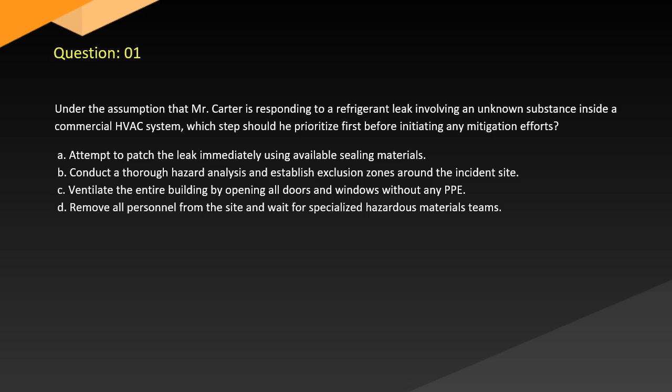Question 1. Under the assumption that Mr. Carter is responding to a refrigerant leak involving an unknown substance inside a commercial HVAC system, which step should he prioritize first before initiating any mitigation efforts? A. Attempt to patch the leak immediately using available sealing materials. B. Conduct a thorough hazard analysis and establish exclusion zones around the incident site. C. Ventilate the entire building by opening all doors and windows without any PPE. D. Remove all personnel from the site and wait for specialized hazardous materials teams.

Answer. Correct answer: B. Explanation: The first priority during a hazardous material leak incident is to conduct a thorough hazard analysis and establish exclusion zones - hot, warm, cold - per OSHA 29 CFR 1910.120 and EPA emergency response guidelines. This ensures personnel safety by controlling access based on risk levels before any mitigation or decontamination.

Immediate patching (A) or ventilating (C) without hazard assessment and PPE can exacerbate exposure risks. While evacuating personnel (D) is important, setting control zones is the critical initial step for site safety and effective incident management per the Incident Command System (ICS). This step aligns with OSHA's hazardous waste operations and emergency response HAZWOPER standards.

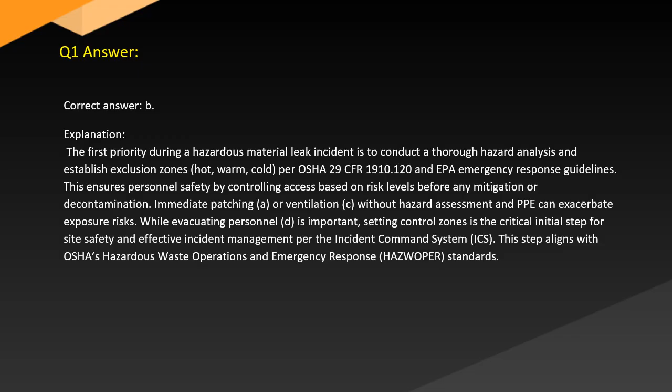Answer. Correct answer: B. Explanation: For moderate concentrations of ammonia, Level B PPE is recommended because it provides splash protection with SCBA for respiratory safety, without the full vapor-tight encapsulation required in unknown or highly toxic atmospheres (Level A). OSHA 29 CFR 1910.120 outlines PPE selection based on exposure risk and substance properties. Level C is insufficient due to ammonia's high toxicity and potential for severe respiratory damage. Level D offers no respiratory protection and is only for non-hazardous conditions. Choosing the correct PPE level minimizes exposure risk while balancing mobility and protection.

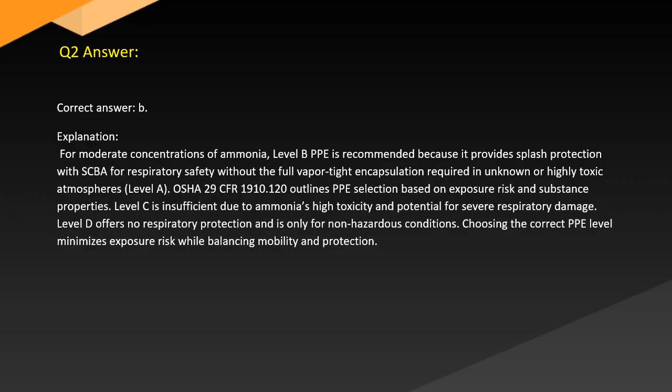Question 3. Given the circumstances that Mr. Lopez finds a leaking container labeled with a Class 2.3 poisonous gas placard but the UN number is missing, what should be Mr. Lopez's immediate action according to hazardous material regulations? A. Ignore the missing number since the placard identifies the hazard class. B. Consult the emergency response guidebook using the hazard class to identify the substance and take appropriate action. C. Attempt to transfer the contents to a properly labeled container. D. Remove the placard to avoid alarming people nearby.

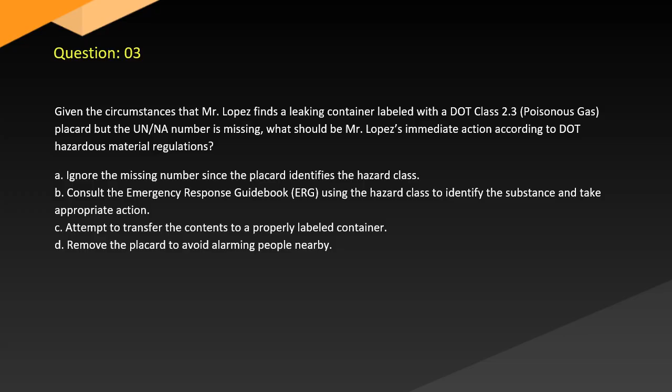Answer. Correct answer: B. Explanation: When a container lacks the UN number but displays a placard, responders must use the placard hazard class to reference the emergency response guidebook to identify potential risks and response protocols, per 49 CFR 172 Subpart F. Ignoring the missing number (A) can lead to incorrect handling. Transferring the contents (C) is hazardous without full identification, and removing placards (D) violates regulations and compromises safety. The ERG provides essential initial guidance based on hazard class, enabling safe incident management.

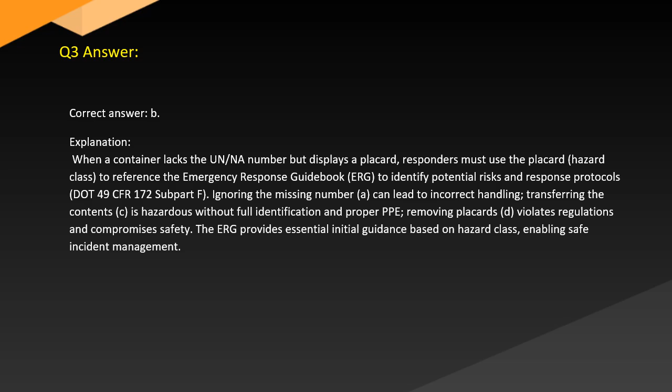Answer. Correct answer: A. Explanation: HFCs replaced CFCs primarily due to low ozone depletion potential, per Montreal Protocol compliance. However, HFCs can have high acute toxicity and may cause respiratory irritation, cardiac sensitization, or central nervous system effects if improperly handled, per EPA guidelines and OSHA standards. CFCs, while less acutely toxic, persist in the environment and deplete ozone. Neither is completely harmless. Thus, proper PPE and ventilation remain essential. The key health difference is toxicity profiles, not absence of risk.

Question 5. When considering decontamination procedures after a technician is exposed to a refrigerant spill with oil contamination, which decontamination approach is most appropriate to prevent secondary contamination and health risks? A. Gross decontamination followed by technical decontamination with specific solvents for compressor oil. B. Immediate dry brushing to remove all residues without any water. C. Allowing the oil to evaporate naturally before leaving the site. D. Using household detergents without PPE in a non-designated area.

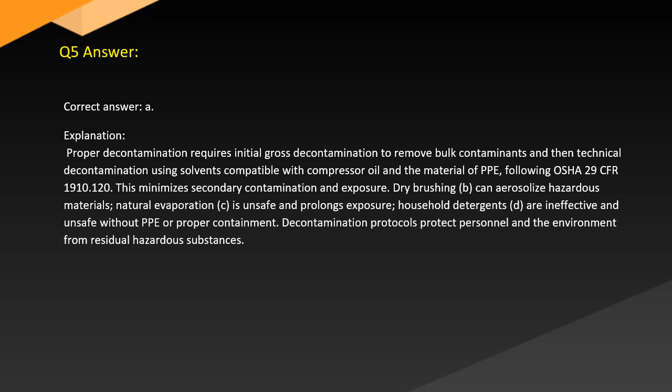This minimizes secondary contamination and exposure. Dry brushing (B) can aerosolize hazardous materials, and natural evaporation is unsafe and prolongs exposure. Household detergents (D) are ineffective and unsafe without PPE or proper containment. Decontamination protocols protect personnel and the environment from residual hazardous substances.

Question 6. From a practical standpoint, during a hazardous materials incident involving propane gas leakage at an HVACR site, which containment method should be prioritized to minimize fire and explosion risks? A. Use diking and damming to contain liquid propane pools on the ground.

B. Apply dry absorbents directly to the propane vapor cloud. C. Initiate vapor suppression using foam agents to reduce vapor release. D. Increase ventilation without any containment efforts.

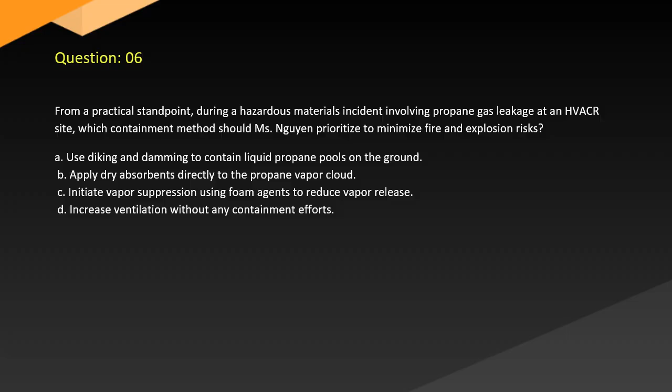Answer: Correct answer C. Explanation: Propane is highly flammable, and vapor suppression using foam agents (AFFF) is effective in minimizing vapor release and reducing fire explosion risk, as recommended by NFPA 58 and EPA spill response guidelines. Diking (A) is more suitable for liquid pools, but propane vaporizes quickly.

Dry absorbents (B) do not affect gases. Ventilation (D) without containment can spread flammable vapors, increasing hazards. Vapor suppression stabilizes the atmosphere and enhances safe mitigation.

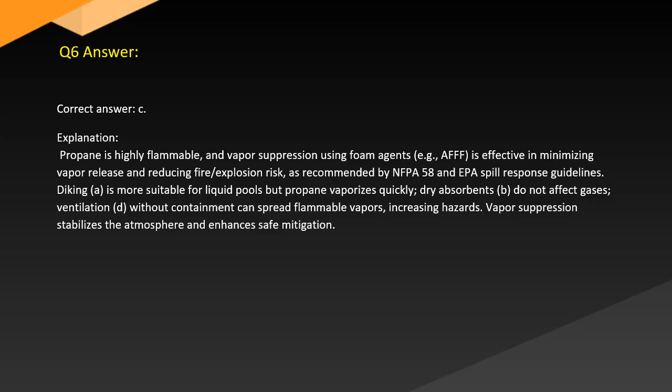Question 7. Considering the evidence from recent emergency response cases, which of the following best describes the critical aspect of establishing exclusion zones during an HVACR hazardous material incident? A. Exclusion zones are set arbitrarily based on available space around the incident.

B. The hot zone includes the contamination area where only fully protected personnel may enter. C. The cold zone is where hazardous materials are concentrated and requires the highest PPE level. D. Exclusion zones are not necessary if the incident involves non-toxic refrigerants.

Answer: Correct answer B. Explanation: Exclusion zones are based on risk assessment and site characterization, not arbitrary space allocation, contradicting A. The hot zone, or exclusion zone, includes the contamination area and requires the highest PPE level and restricted access, per OSHA 29 CFR 1910.120.

The cold zone is a safe area for support personnel and the command post, not the contamination zone, contradicting C. Even non-toxic refrigerants can pose physical hazards, so zones are always needed, contradicting D. Proper zone management is essential for safety and effective incident control.

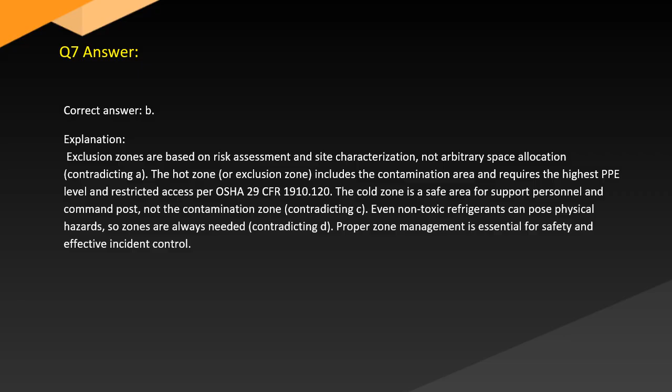Question 8. When evaluating the merits of using air purifying respirators (APRs) versus self-contained breathing apparatus (SCBA) during an HVACR refrigerant leak, which statement best reflects their appropriate application? A. APRs are suitable for unknown concentrations of toxic refrigerants.

B. SCBAs provide independent air supply and are required for oxygen-deficient or highly toxic environments. C. APRs offer better protection than SCBAs in confined spaces. D. SCBAs should be avoided due to bulkiness and mobility constraints.

Answer: Correct answer B. Explanation: SCBAs supply breathable air independent of ambient atmosphere and are mandated by OSHA and NIOSH for oxygen-deficient or unknown highly toxic environments, per 29 CFR 1910.134. APRs filter ambient air and are only suitable when the contaminant type and concentration are known and oxygen levels are adequate. APRs are unsafe for unknown or oxygen-deficient atmospheres, contradicting A.

Despite bulkiness, SCBAs provide the highest respiratory protection, contradicting C and D. Selecting respirators based on hazard assessment is critical for safety.

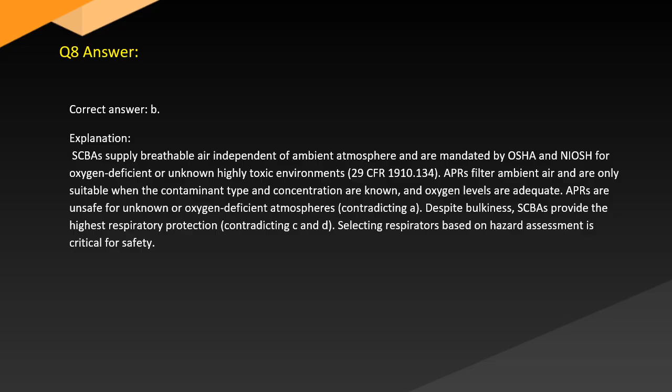Question 9. In the context of hazardous materials laws, Mr. Daniels is reviewing the requirements for documenting an HVACR refrigerant shipment that contains ozone-depleting substances. What is the essential documentation requirement under EPA regulations?

A. Only a verbal statement to the carrier is needed for refrigerant shipment. B. Complete shipping papers including quantity, type of refrigerant, and certification of reclaim or recycling must accompany the shipment. C. No documentation is required for small quantities of refrigerant under 10 pounds. D. Shipping papers only need to state the refrigerant's common name.

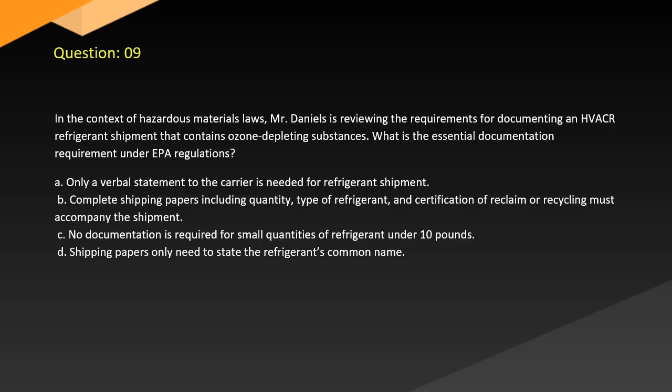Answer: Correct answer B. Explanation: EPA regulations 40 CFR Part 82 require complete shipping papers that include refrigerant quantity, chemical type, and certification that refrigerant has been reclaimed or recycled, per Clean Air Act requirements. This documentation ensures traceability and regulatory compliance.

Verbal statements (A) and incomplete papers (D) are insufficient. Small quantities (C) are still regulated, depending on transport mode and state laws. Proper documentation supports safe transport and environmental protection.

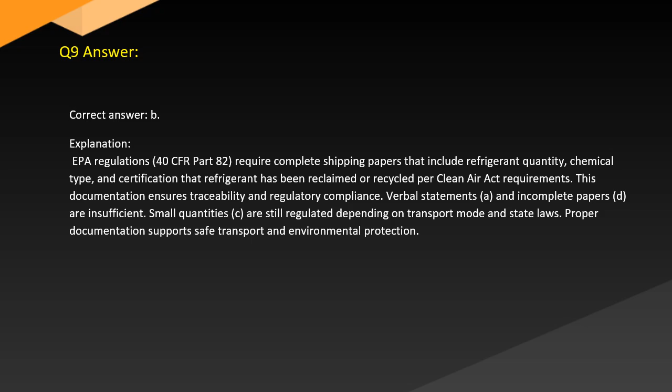Question 10. As demonstrated by an incident where improper container recognition led to a hazardous release, which best describes the importance of understanding container types in hazardous material management for HVACR technicians? A. All containers used in HVACR are standardized and require no special recognition. B. Correct container recognition allows appropriate handling, PPE selection, and spill response tailored to the material's physical and chemical properties. C. Container recognition only matters for transportation personnel, not field technicians. D. Containers with damaged labels should be ignored as they are no longer valid. Answer: Correct answer B.

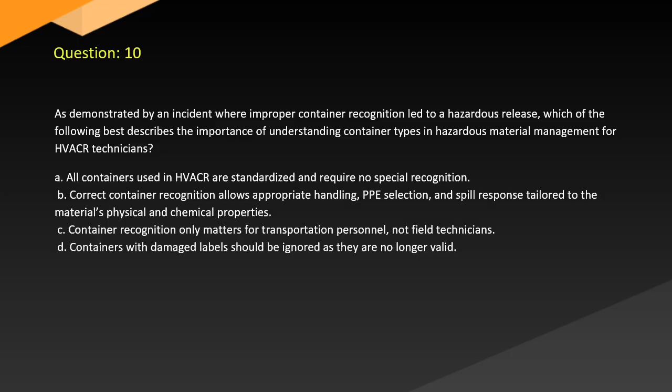Explanation: HVACR technicians must recognize container types, e.g., cylinders, drums, bulk tanks, to determine potential hazards such as pressure, chemical reactivity, and appropriate PPE and containment methods, per 49 CFR and OSHA HAZWOPER standards. This knowledge is critical for safe handling and emergency response. Assuming standardization is unsafe; container recognition is vital for all responders, including technicians, contradicting C. Damaged labels require extra caution and should never be ignored, contradicting D. Proper container identification reduces risk and enhances safety.

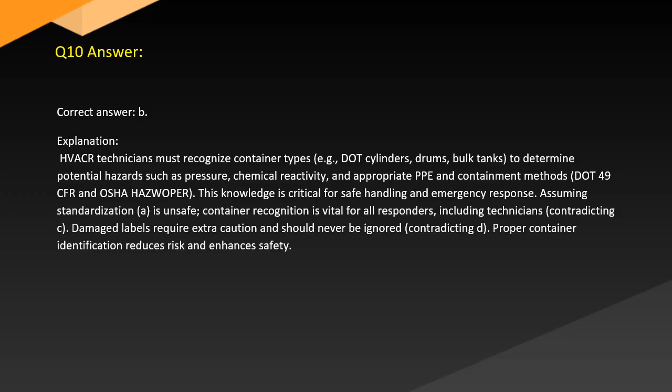Question 11. In the context of a hazardous refrigerant leak at a large commercial HVAC site, Mr. Patel must determine the appropriate exclusion zone boundaries. Given a volatile and toxic refrigerant release, what is the best approach for establishing these zones? A. Establish a cold zone directly surrounding the leak source to allow for quick personnel access. B. Define the hot zone around the contamination area, restricting access only to personnel in full Level A. C. Use a single exclusion zone encompassing the entire site to simplify control measures. D. Assign the warm zone to the area with highest vapor concentration and allow only non-PPE personnel to enter.

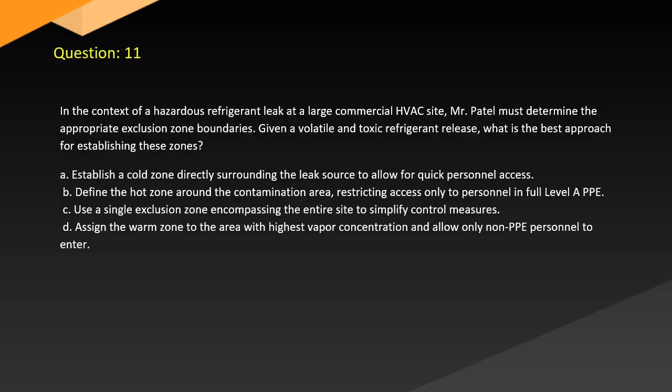Answer: Correct answer B. Explanation: According to OSHA 29 CFR 1910.120 and EPA emergency response standards, the hot zone is the area with actual contamination or hazard where only personnel equipped with the highest level of PPE, Level A, can enter. The cold zone is a safe area for command and support personnel, while the warm zone acts as a buffer used for decontamination and support functions. Simplifying all zones into one, as in C, reduces safety and control. Warm zones are restricted, not open to non-PPE personnel, contradicting D. Correct zone definition is essential for protecting responders and the public.

Question 12. Based on the information Mr. Thomas has regarding an HVACR compressor oil spill mixed with refrigerant, which chemical protective clothing consideration should guide his PPE selection? A. Use standard rubber gloves as compressor oil is non-toxic and non-corrosive. B. Select chemically resistant gloves and suits compatible with both oil and refrigerant to prevent skin absorption and chemical burns. C. Only respiratory protection is necessary, as skin contact with compressor oil is harmless. D. Use cotton clothing with no respiratory or chemical protection to maximize comfort.

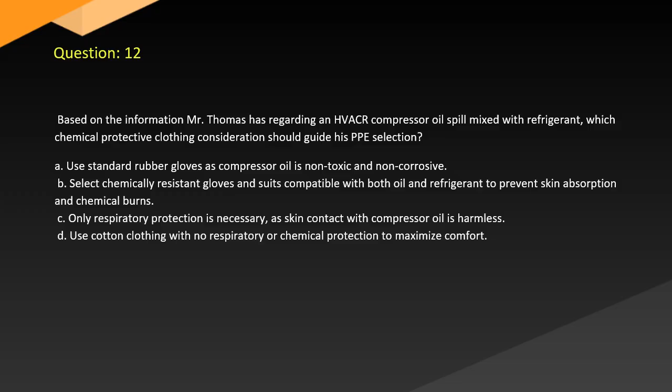Answer: Correct answer B. Explanation: Compressor oil can contain additives and breakdown products that are toxic and irritating, while refrigerants can cause frostbite and chemical burns. OSHA 29 CFR 1910.120 requires chemical-resistant protective clothing compatible with the substances involved. Standard rubber gloves may degrade and provide insufficient protection. Skin absorption and chemical burns are risks, making comprehensive PPE critical. Neglecting skin protection or respiratory equipment increases hazard exposure.

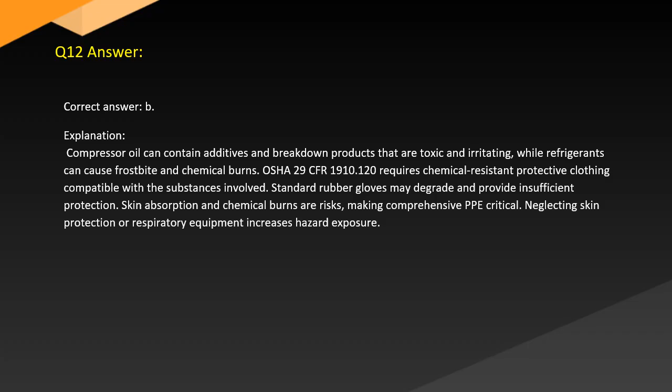Question 13. When analyzing the merits of using dry absorbents versus adsorbents during an HVAC or refrigerant spill, which best explains their appropriate use? A. Absorbents soak up liquids by penetration, while adsorbents bind contaminants on their surface; both are suitable depending on the spill type. B. Dry absorbents and adsorbents function identically and can be used interchangeably. C. Adsorbents dissolve the refrigerant chemically, while absorbents neutralize the spill. D. Neither absorbents nor adsorbents are effective for refrigerant spills.

Answer: Correct answer A. Explanation: Absorbents, e.g., vermiculite, clay, physically soak up liquid spills, while adsorbents, e.g., activated carbon, bind chemicals to their surface without penetration. Selecting the correct material depends on the refrigerant's physical state and chemical properties. This distinction is outlined in EPA spill response and cleanup guides. They are not interchangeable, contradicting B. Neither chemically dissolves nor neutralizes refrigerants, contradicting C. Proper use enhances cleanup efficiency and safety.

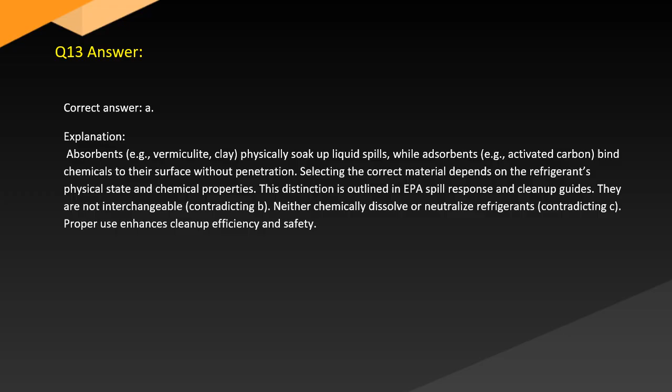Question 14. With respect to HVACR hazardous material shipping, Lewis is verifying compliance with DOT labeling and placarding requirements. Which of the following is true regarding placards for hazardous material shipments? A. Placards must be displayed on all four sides of the transport vehicle for shipments of 1,001 pounds or more of hazardous materials. B. Placards are optional for bulk shipments under 5,000 pounds. C. Only the shipping container requires placards, not the transport vehicle. D. Placards must be removed immediately after loading is complete.

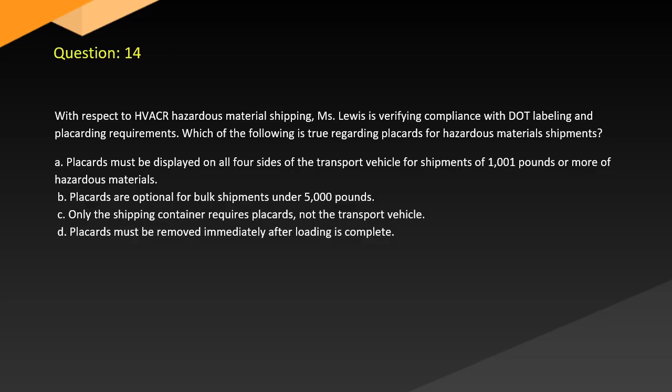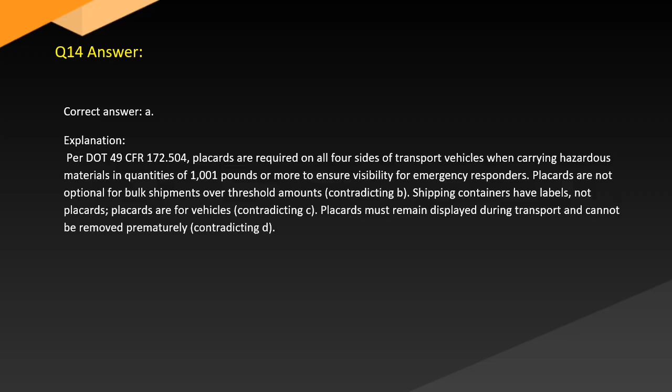Answer: Correct answer A. Explanation: Per DOT 49 CFR 172.504, placards are required on all four sides of transport vehicles when carrying hazardous materials in quantities of 1,001 pounds or more, to ensure visibility for emergency responders. Placards are not optional for bulk shipments over threshold amounts, contradicting B. Shipping containers have labels, not placards; placards are for vehicles, contradicting C. Placards must remain displayed during transport and cannot be removed prematurely, contradicting D.

Question 15. Considering the evidence from HVACR emergency response protocols, Mr. Garcia is tasked with selecting the most effective ventilation method after a refrigerant vapor release indoors. Which ventilation strategy minimizes hazard spread and exposure?

A. Use positive pressure ventilation to force fresh air inward from all sides. B. Implement natural ventilation by opening windows at low points only. C. Employ mechanical ventilation to create controlled airflow from clean areas to contaminated areas, exhausting outdoors. D. Shut all ventilation systems off to prevent vapor spread.

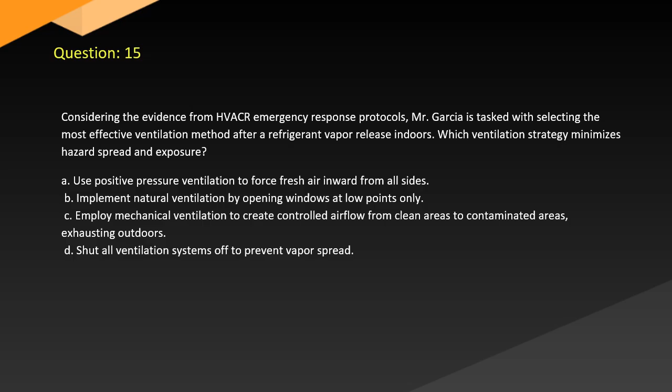Answer: Correct answer C. Explanation: Controlled mechanical ventilation directing airflow from uncontaminated, clean zones to contaminated zones. Venting outdoors minimizes cross-contamination and exposure, per EPA and OSHA HAZWOPER guidelines.

Positive pressure ventilation can push vapors into safe areas, increasing risk. Natural ventilation alone is unpredictable and often insufficient. Shutting off ventilation traps vapors inside, increasing risk. Proper ventilation is critical for effective hazard mitigation.

Question 16. When faced with a scenario where Alvarez detects a refrigerant leak in an HVACR system containing R22, which is being phased out under the EPA SNAP program, what considerations should she keep in mind regarding environmental compliance?

A. R22 can be vented freely as long as the leak is small. B. All venting of R22 during maintenance or disposal is prohibited under EPA regulations. C. R22 leaks require immediate repair but no documentation. D. R22 is not regulated since alternatives exist.

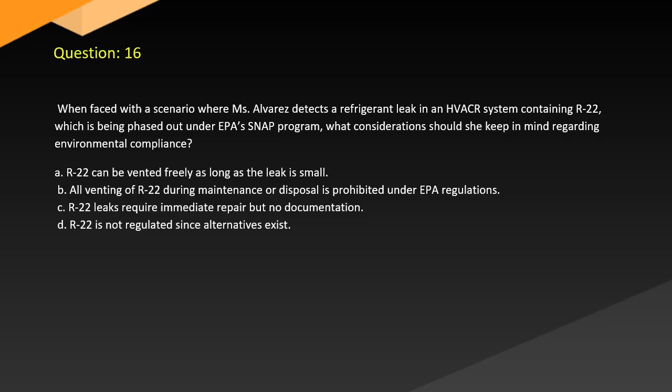Answer: Correct answer B. Explanation: EPA's Significant New Alternatives Policy, SNAP, prohibits venting of ozone-depleting substances like R22 under 40 CFR Part 82. Venting any quantity during maintenance or disposal is illegal.

Immediate repair is required and proper documentation of leak repair and refrigerant handling must be maintained, contradicting C. R22 remains regulated until fully phased out. Free venting (A) or ignoring regulations (D) violates Clean Air Act provisions and may incur penalties.

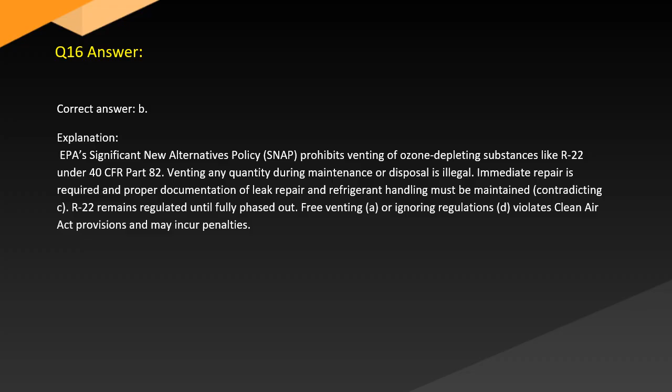Question 17. Under the assumption that Istaun is managing an incident involving combustible dust accumulation in an HVACR maintenance area, which preventive measure aligns best with OSHA and NFPA guidelines to reduce explosion risks?

A. Regular housekeeping to remove dust deposits and ensure proper ventilation. B. Allowing dust accumulation since it is non-hazardous in HVACR environments. C. Using open flames to burn off combustible dust. D. Ignoring dust buildup as long as electrical equipment is grounded.

Answer: Correct answer A. Explanation: OSHA 29 CFR 1910.22 requires good housekeeping to prevent combustible dust accumulation, while NFPA 654 provides guidelines to reduce dust explosion risks through ventilation and dust control.

Dust buildup is hazardous. Ignoring it (B and D), or using open flames (C), can lead to catastrophic explosions. Effective dust control is a key strategy for safety.

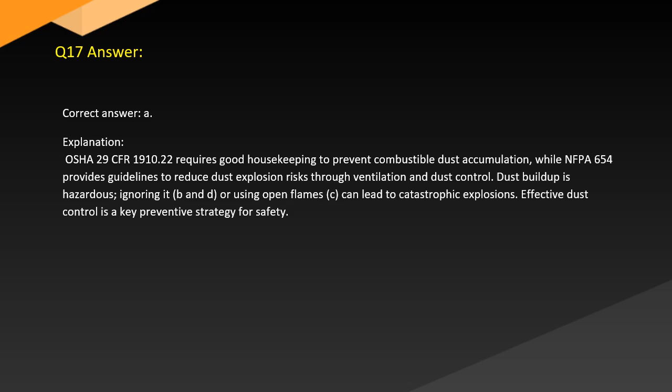Question 18. From the perspective of emergency response communication, Robinson is leading a hazardous material incident. Which communication practice best ensures efficient and safe operations?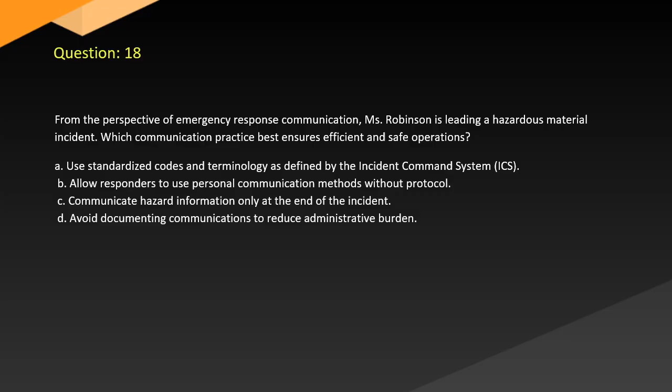A. Use standardized codes and terminology as defined by the Incident Command System (ICS). B. Allow responders to use personal communication methods without protocol. C. Communicate hazard information only at the end of the incident. D. Avoid documenting communications to reduce administrative burden.

Answer: Correct answer A. Explanation: Effective communication following ICS protocols ensures clarity, reduces confusion, and enhances safety during hazardous material incidents, per FEMA ICS guidelines and OSHA 29 CFR 1910.120. Personal or ad hoc communication (B)...

Risks miscommunication. Delayed hazard communication (C) endangers responders and the public. Documentation (D) is essential for accountability and post-incident analysis. Standardized communication supports coordinated response.

Question 19. When analyzing the physical properties of refrigerants, Jackson must consider the importance of vapor pressure in relation to containment and leak risks. Which statement best reflects this relationship?

A. High vapor pressure refrigerants evaporate quickly, increasing leak and exposure risks. B. Vapor pressure has no impact on refrigerant leak hazards. C. Low vapor pressure refrigerants are more likely to vaporize at room temperature. D. Vapor pressure only affects refrigerant efficiency, not safety.

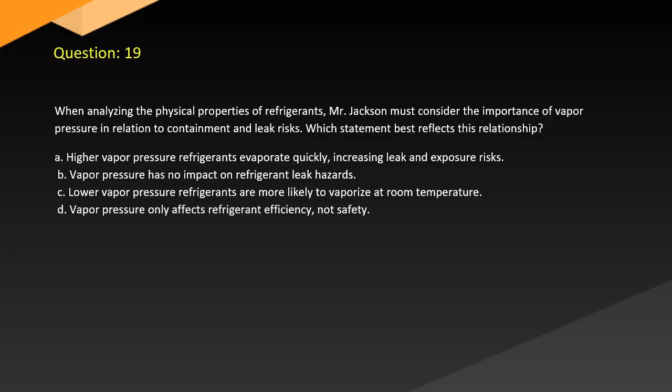Answer: Correct answer A. Explanation: Refrigerants with high vapor pressure evaporate rapidly at ambient temperatures, creating a greater potential for leaks and hazardous vapor exposure, per the ASHRAE Handbook Fundamentals. Understanding vapor pressure helps technicians anticipate containment needs and select appropriate leak detection and PPE.

Ignoring vapor pressure (B and D) risks underestimating hazards. Low vapor pressure refrigerants tend to remain liquid longer, reducing immediate vapor hazards, contradicting C.

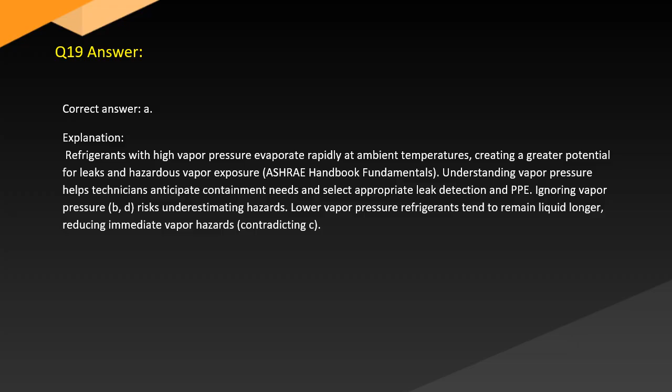Question 20. In terms of hazardous materials incident waste management, Carter must ensure proper disposal of contaminated PPE after responding to an HVACR refrigerant leak. Which practice complies with hazardous waste regulations? A. Dispose of contaminated PPE as regular trash to avoid complicating waste handling. B. Decontaminate PPE thoroughly and reuse without any special handling. C. Collect contaminated PPE in labeled hazardous waste containers and coordinate disposal through licensed waste handlers. D. Burn contaminated PPE on site to destroy hazards immediately.

Answer: Correct answer C. Explanation: OSHA 29 CFR 1910.120 and EPA Resource Conservation and Recovery Act require contaminated PPE to be segregated, labeled, and disposed of via licensed hazardous waste disposal companies to prevent environmental contamination and personnel exposure. Regular trash disposal (A) and on-site burning (D) are illegal and dangerous. Reuse with decontamination or special handling (B) risks secondary contamination. Proper waste management is essential for legal compliance and safety.

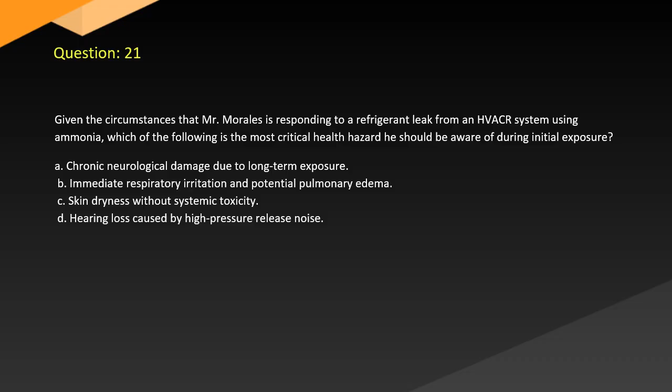Question 21. Given the circumstances that Mr. Morales is responding to a refrigerant leak from an HVACR system using ammonia, which of the following is the most critical health hazard he should be aware of during initial exposure? A. Chronic neurological damage due to long-term exposure. B. Immediate respiratory irritation and potential pulmonary edema. C. Skin dryness without systemic toxicity. D. Hearing loss caused by high-pressure release noise.

Answer: Correct answer B. Explanation: Ammonia is a highly irritating and corrosive gas that primarily affects the respiratory system upon acute exposure, potentially causing pulmonary edema and respiratory distress (OSHA 29 CFR 1910.1000 and NIOSH Pocket Guide). Chronic neurological effects are less common compared to acute respiratory hazards. Skin exposure can cause burns but is less likely to produce systemic effects. Hearing loss (D) is unrelated to ammonia's chemical hazard. Awareness of acute respiratory risks guides immediate response and PPE selection.

Question 22. Under the assumption that Ms. Chen is selecting respirators for an incident involving R-410A refrigerant leakage, which statement accurately describes the respirator choice considering OSHA respiratory protection standards? A. An air purifying respirator (APR) with organic vapor cartridges is sufficient for all concentrations. B. A self-contained breathing apparatus (SCBA) is required if the oxygen level is unknown or below 19.5%. C. No respiratory protection is needed due to the low toxicity of R-410A. D. A surgical mask provides adequate protection against refrigerant vapors.

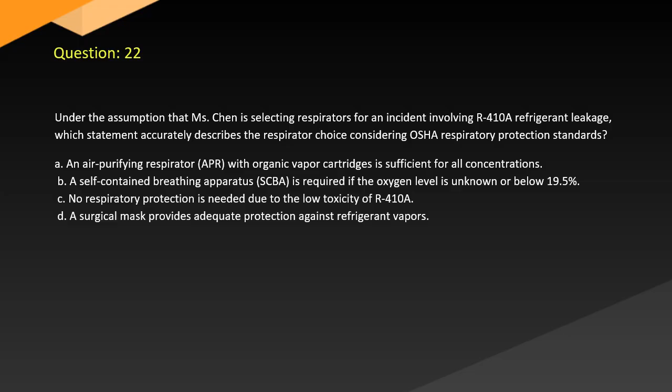Answer: Correct answer B. Explanation: OSHA 29 CFR 1910.134 requires SCBA in oxygen-deficient or unknown atmospheres, which is common in refrigerant leaks due to displacement of oxygen by refrigerant vapors. APRs (A) are only suitable when the contaminant and concentration are known and oxygen levels are adequate. R-410A, while having low acute toxicity, can cause asphyxiation and frostbite, contradicting C. Surgical masks (D) offer no protection from chemical vapors. Respirator selection must prioritize safety based on hazard and oxygen levels.

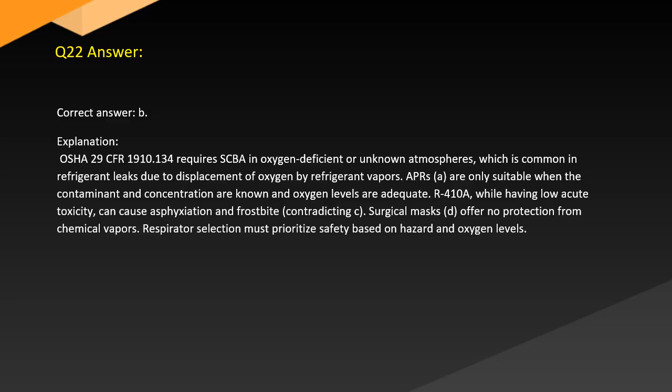Question 23. When evaluating Mr. O'Neill's site control measures during a hazardous materials incident involving flammable refrigerant, which of the following best describes the purpose of the warm zone? A. The area where contamination is highest and only fully encapsulated PPE is allowed. B. The transition area between contaminated and clean zones used for decontamination and support. C. The unrestricted safe zone where no PPE is required. D. The perimeter around the incident that controls public access only.

Answer: Correct answer B. Explanation: The warm zone serves as a buffer and transition area between the hot, contaminated, and cold, clean zones, designated for decontamination, equipment staging, and support personnel per OSHA HAZWOPER guidelines. The hot zone (A) is where the hazard is present and requires full PPE. The cold zone (C) is the safe area where no PPE is necessary. Perimeter control (D) is part of the cold zone function. Proper zone setup ensures safety and contamination control.

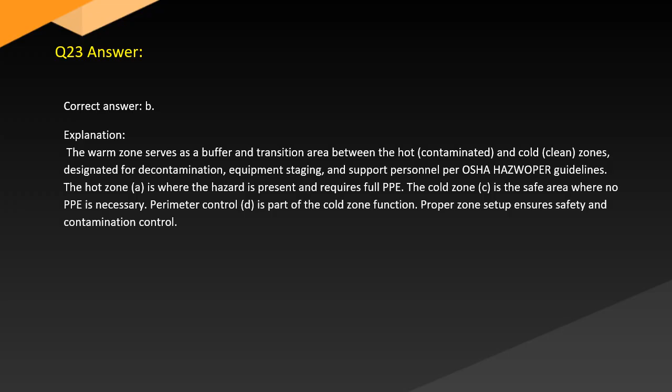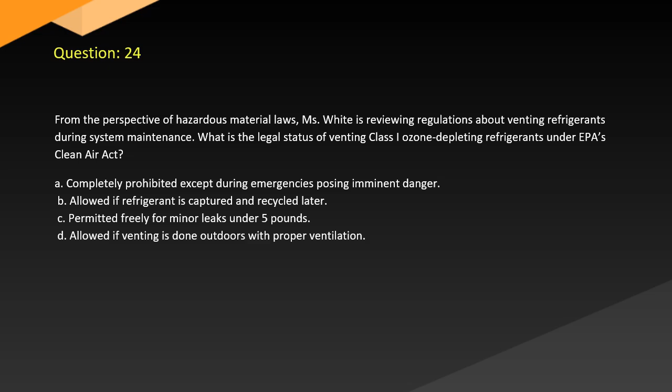Question 24. From the perspective of hazardous material laws, White is reviewing regulations about venting refrigerants during system maintenance. What is the legal status of venting Class I ozone-depleting refrigerants under EPA's Clean Air Act? A. Completely prohibited except during emergencies posing imminent danger. B. Allowed if refrigerant is captured and recycled later. C. Permitted freely for minor leaks under 5 pounds. D. Allowed if venting is done outdoors with proper ventilation.

Answer: Correct answer A. Explanation: Under the EPA Clean Air Act, Section 608, venting Class I ozone-depleting substances like CFCs and some HCFCs is prohibited except when release poses immediate danger to safety (40 CFR Part 82). Capturing and recycling (B) is required to prevent atmospheric release. Minor leaks (C) are not exempt. Outdoor venting (D) still constitutes a release and is illegal. Compliance with these regulations is critical for environmental protection and legal adherence.

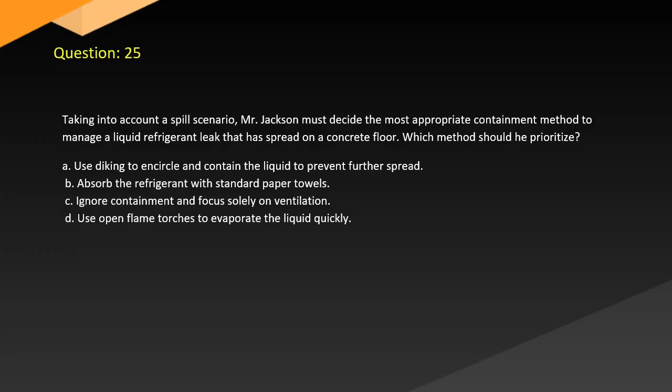Question 25. Taking into account a spill scenario, Mr. Jackson must decide the most appropriate containment method to manage a liquid refrigerant leak that has spread on a concrete floor. Which method should he prioritize? A. Use diking to encircle and contain the liquid to prevent further spread. B. Absorb the refrigerant with standard paper towels. C. Ignore containment and focus solely on ventilation. D. Use open flame torches to evaporate the liquid quicker.

Correct answer: A. Diking involves creating physical barriers around spilled liquids to contain them and prevent further migration, which is critical for controlling liquid refrigerants and minimizing exposure, per EPA and OSHA spill response guidelines. Paper towels (B) are ineffective for hazardous liquids. Ignoring containment (C) increases hazard spread. Using flames (D) risks ignition and explosion. Proper containment is fundamental for spill control and responder safety.

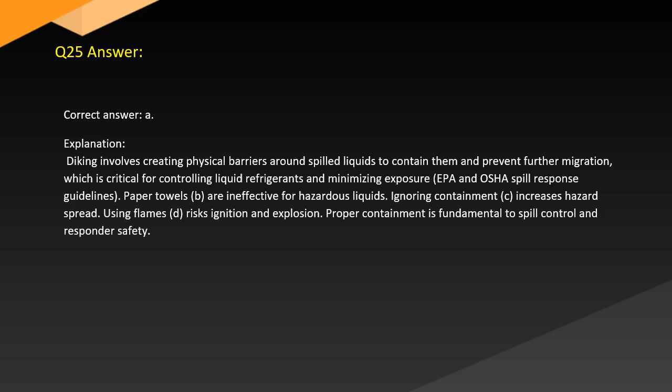Question 26. Which of the following best explains why PPE inspection is a critical step before donning during hazardous materials response, as Mr. Lee demonstrates? A. To ensure PPE is clean and aesthetically pleasing. B. To identify any physical damage, leaks, or defects that could compromise protection. C. To ensure that PPE fits loosely for comfort during response. D. To allow sharing of PPE among responders to conserve resources.

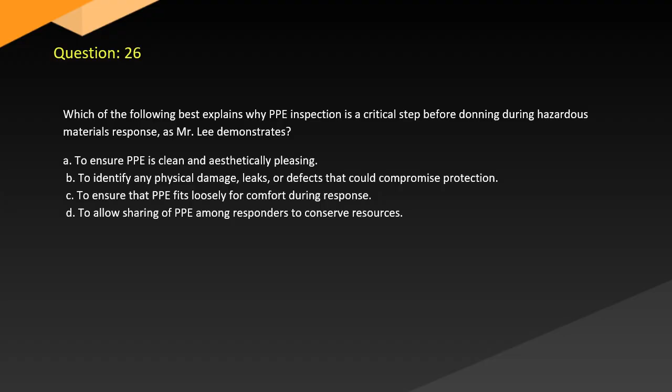Correct answer: B. OSHA 29 CFR 1910.120 requires inspection of PPE prior to use to detect tears, cracks, chemical degradation, or malfunction that could lead to exposure. Proper inspection ensures PPE integrity and responder safety. Cleanliness (A) is secondary to functional integrity. PPE must fit snugly, not loosely (C). Sharing PPE (D), without proper decontamination, risks cross-contamination and is unsafe.

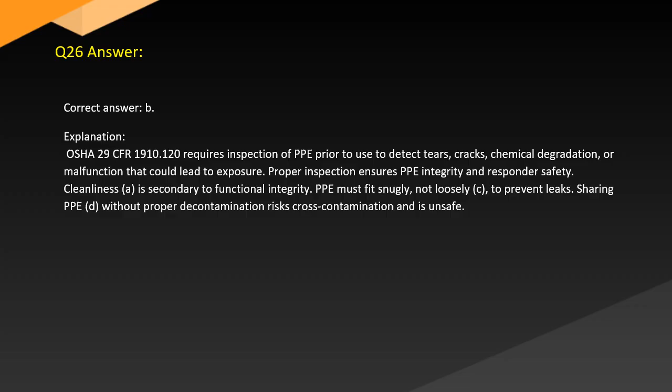Question 27. With the advent of newer refrigerants, Mr. Simmons must understand the importance of reviewing the material safety data sheet (MSDS) during an HVACR hazardous material incident. What critical information does the MSDS provide for emergency response? A. Chemical composition, physical hazards, health risks, and recommended PPE and first aid measures. B. Only the chemical formula and trade name. C. General maintenance procedures for HVACR equipment. D. Sales and pricing information for refrigerants.

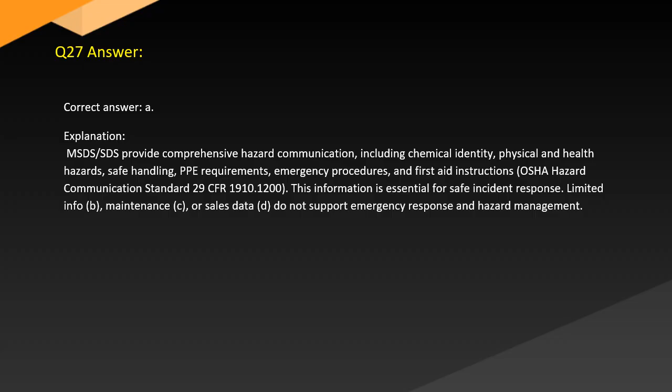Correct answer: A. MSDS provide comprehensive hazard communication, including chemical identity, physical and health hazards, safe handling, PPE requirements, emergency procedures, and first aid instructions, per OSHA Hazard Communication Standard 29 CFR 1910.1200. This information is essential for safe incident response. Limited info (B), maintenance (C), or sales data (D) do not support emergency response and hazard management.

Question 28. In terms of hazardous material container recognition, Ms. Gomez encounters a leaking cylinder with a rusty valve and unclear labeling. What is the best immediate action according to DOT and OSHA standards? A. Attempt to open the valve to relieve pressure and identify contents. B. Secure the area, notify hazardous material response personnel, and avoid direct contact. C. Remove the label and replace it with a handwritten note. D. Transfer contents to a new container without PPE to prevent spills.

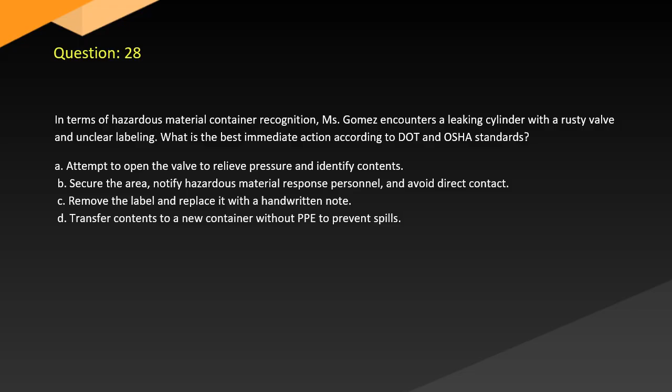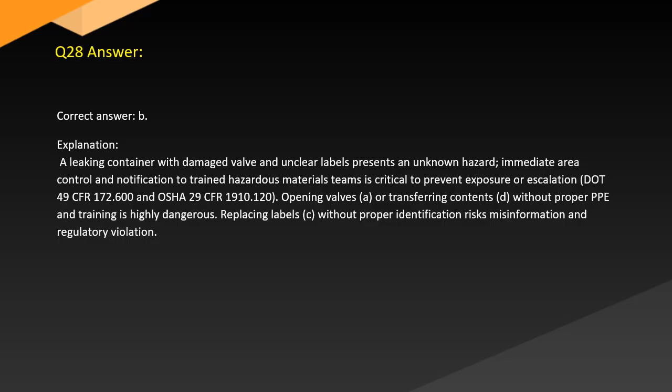Correct answer: B. A leaking container with a damaged valve and unclear labels presents an unknown hazard. Immediate area control and notification to trained hazardous materials teams is critical to prevent exposure or escalation, per 49 CFR 172.600 and OSHA 29 CFR 1910.120. Opening valves (A) or transferring contents (D) without proper PPE and training is highly dangerous. Replacing labels (C) without proper identification risks misinformation and regulatory violation.

Question 29. The underlying principle of patching and plugging leaks during an HVACR hazardous material incident involves which of the following? A. Temporarily isolating the leak to minimize release while planning for permanent repair. B. Permanently sealing the system regardless of conditions. C. Using any available adhesive to close the leak without hazard assessment. D. Ignoring small leaks as they will dissipate naturally.

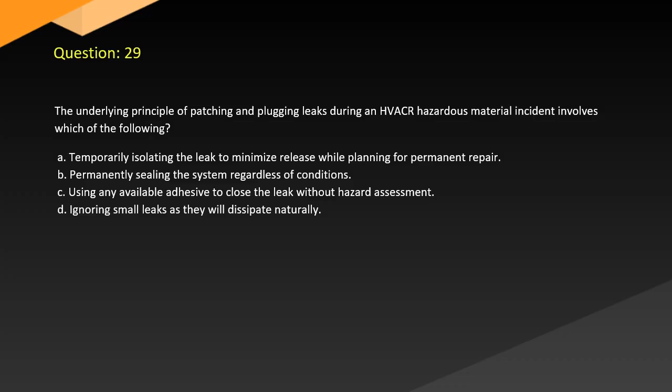Correct answer: A. Patching and plugging are interim containment methods to minimize hazardous releases until permanent repairs can be safely completed, per NFPA 472 and OSHA 1910.120. Permanent sealing (B) requires planned repair under controlled conditions. Using random adhesives (C) without hazard evaluation can worsen leaks or cause reactions. Ignoring leaks (D) violates standards and increases exposure risk. Proper patching is a key spill control skill.

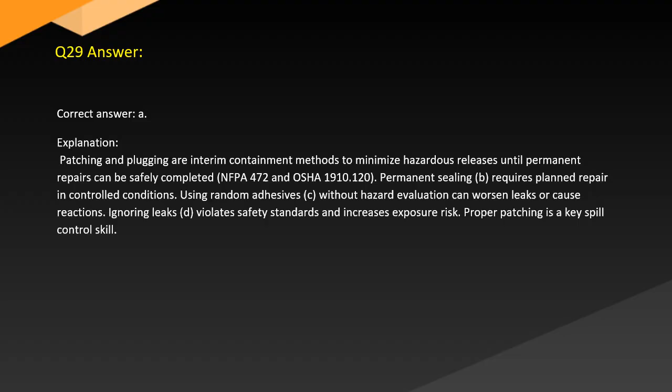Question 30. While examining refrigerant hazards, Mr. Davis notes that some refrigerants have low toxicity but high flammability. How should this influence his hazard assessment and response? A. Prioritize ignition control measures and use intrinsically safe equipment to prevent fire or explosion. B. Focus only on toxicity hazards and ignore flammability. C. Use no PPE since low toxicity means low risk. D. Ventilate only after extinguishing any ignition sources.

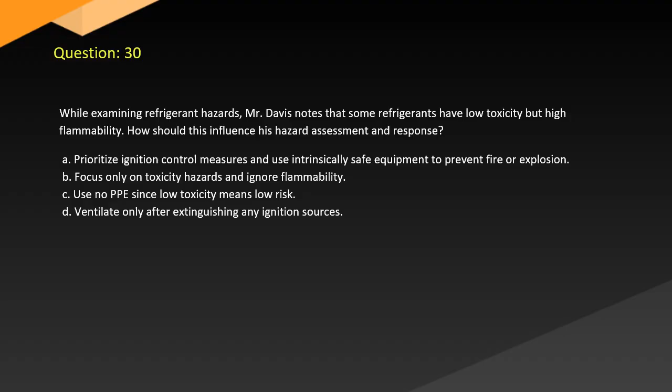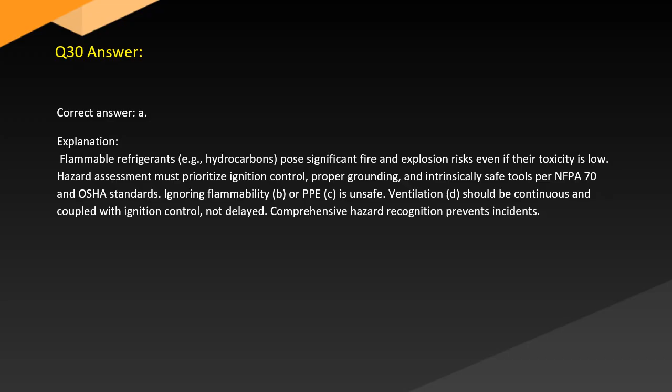Correct answer: A. Flammable refrigerants, e.g. hydrocarbons, pose significant fire and explosion risks even if their toxicity is low. Hazard assessment must prioritize ignition control, proper grounding, and intrinsically safe tools per NFPA 70 and OSHA standards. Ignoring flammability (B) is unsafe. Ventilation (D) should be continuous and coupled with ignition control, not delayed. Comprehensive hazard recognition prevents incidents.